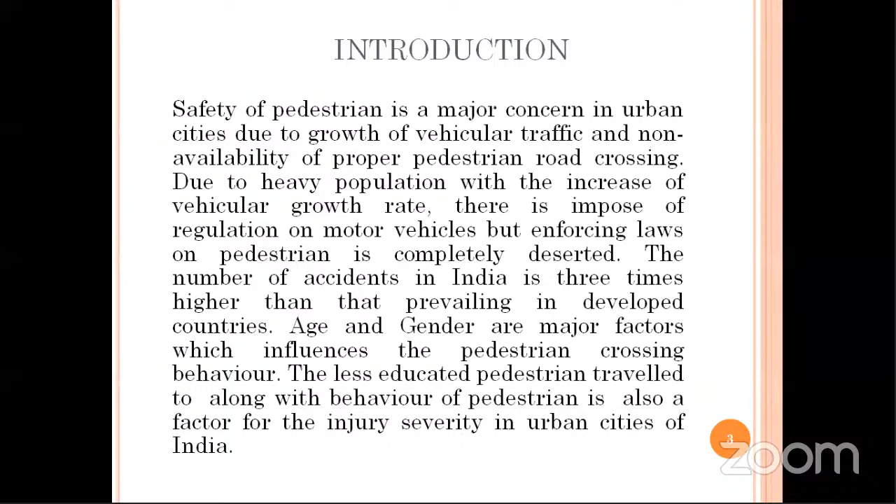There is some thesis we have studied, and some findings are there. From author Jen et al. in 2014, they find that the duration of crossing time varies from 4 to 10 seconds based on different age groups. Children are crossing the roads with higher speed than young and older pedestrians.

Zhuang and all in 2011 studied that about 65.70% of pedestrians are not serious about looking for vehicles, even upon arriving at the curb and before crossing the road. And Guo and all in 2017 found that pedestrians are often compelled to run while crossing the road before the allocated green time elapses.

In Mayono 2002, they find that young pedestrians between 17 and 25 years of age consistently score higher on model competence than adults. And Khatoon and all in 2013 found that male and young adults have a higher probability of road crossing as compared to female and older persons.

These are the findings of the authors. Now what are the drawbacks? In Kadali and all 2013, the shortcomings are that they assume the pedestrian's change in direction is always the same in different conditions, and consider it as a binary condition.

What is the scope? In the real field, pedestrians may change their crossing pattern in different ways according to their suitability. In Khatoon and all, 2013, their shortcoming is they did not correlate the observed risk with actual crashes, as actual data was not collected. From this we have scope that to narrate such correlations, we need to collect required data from police records over a long period, from which we can calculate data and find future scope.

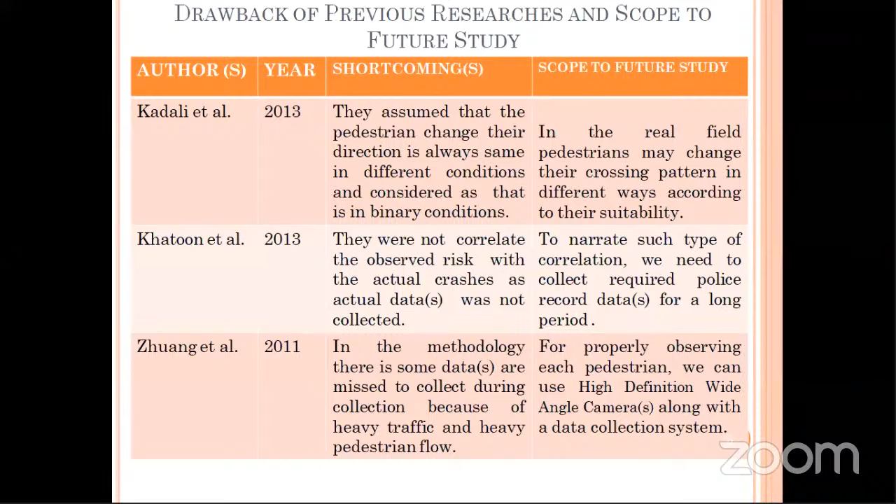In Zhuang and all, 2011, the shortcoming in their methodology is that some data were missed during collection because of heavy traffic and heavy pedestrian flow, as they stated in the paper. What is the scope? For properly observing each pedestrian, we can use high definition wide angle cameras along with data collection systems. These are the scopes, and then we moved through a methodology using high definition cameras.

The field questionnaire survey was conducted during the peak hour of the day, one day in a city, under different conditions. The variables include age, education, monthly income, and pedestrian situation.

We also took the situations of pedestrians on the road, whether they are not hurried, moderate hurried, or most hurried. If they are not hurried, they will listen to you. If moderate hurried, they will listen but aren't interested in giving answers sometimes. But if most hurried, they will not listen, will not bother about you, and will cross the road as usual, not caring about the survey. These are the situations and variables we have taken.

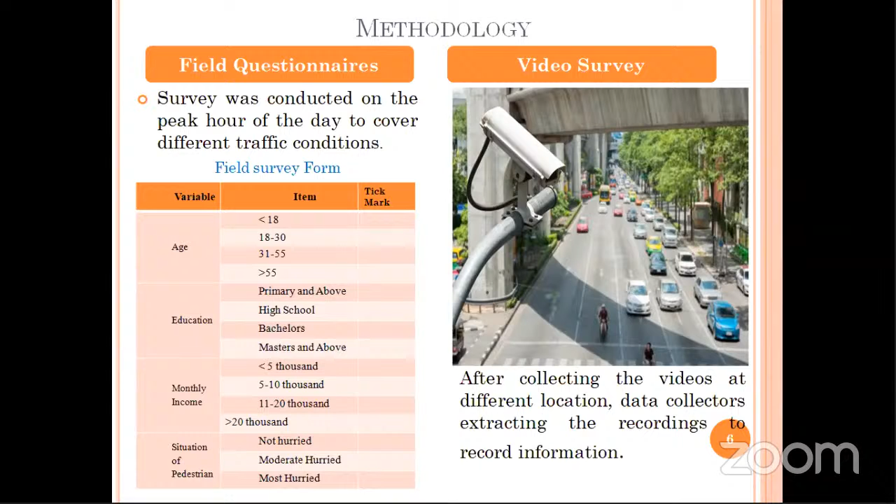This shows the variation of time with respect to age and gender of the pedestrian. Children pedestrians take 17.87% more waiting time due to fear of crossing the road than adults.

While observing the data, we found that children follow their elders. They fear crossing the road and will wait for a time, but when their elders are about to start crossing, they will run and cross the road in a hurry, speeding up.

Due to this, accidents may occur. We found that children take 21.9% less time to cross the road when following their elders.

Survey results show that adult pedestrians are more liable to risky crossing behavior, decreasing both waiting time and crossing time compared to older pedestrians. However, children take less time due to their childishness, as they are following their elders.

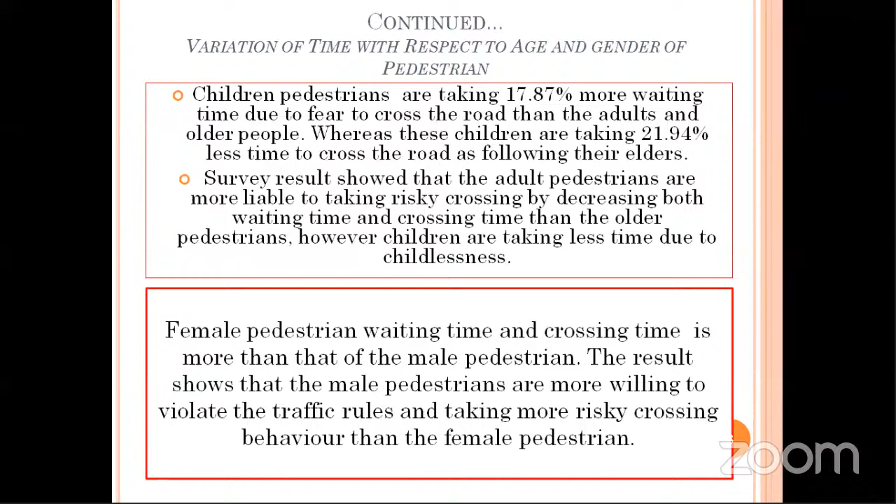We have also taken data from the crime branch of Odisha, as our research was conducted there, on the number of pedestrians killed. You can see that younger pedestrians, aged 25 to 34 years, are more often killed while crossing the road.

This is because they are not interested in following regulations. They may be aware of the rules but are not interested in following them, as they are in a hurry due to their freakiness and youthfulness. In India, we found that young male pedestrians are the most vulnerable group in the system.

There is a high rate of accidents occurring in the 18 to 54 age group due to their carelessness and aggressive behavior while crossing.

Whenever we ask questions to the younger pedestrians during questionnaires, they don't bother about what you are asking. Even when we ask about wearing helmets or watching the roadside, they won't bother. So we have to make strong rules and regulations, and provide some facilities to make them safer.

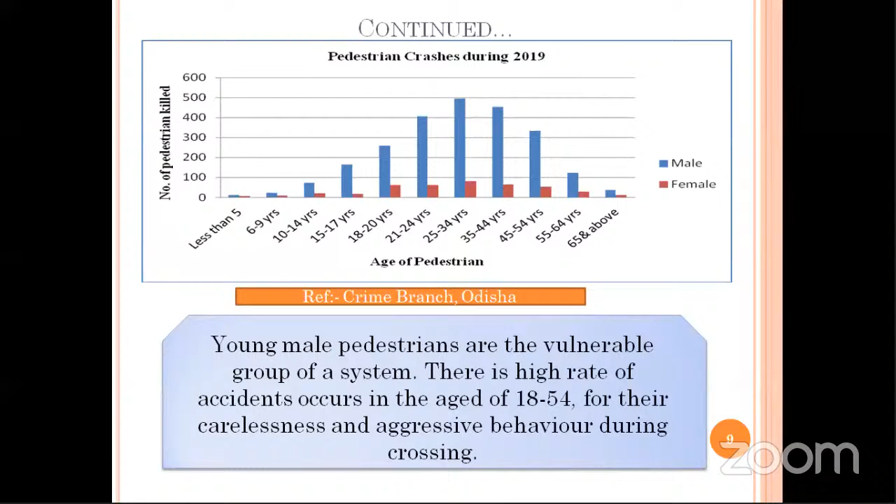From this observation, we conclude that male pedestrians have significantly faster walking speed than female pedestrians. Male pedestrians are more willing to violate traffic rules, and children and younger pedestrians need to be significantly guided and motivated by their guardians regarding traffic safety. Lack of awareness and less education cause more pedestrian accidents.

Based on the lifestyle of a developing country like India, people are not serious about road safety guidelines because they are always trying to develop themselves and are in a hurry to compete with others. They want to make their lifestyles higher than others.

The duration of waiting time and crossing time for pedestrians can be used to develop a safety model, with awareness cum pre-implementation of rule programs organized in coordination with road users like pedestrians. We can't just implement or force rules and regulations onto pedestrians; we have to include them in preparing the rules and take feedback from them. Only then can we implement rules and regulations for the betterment of pedestrians.

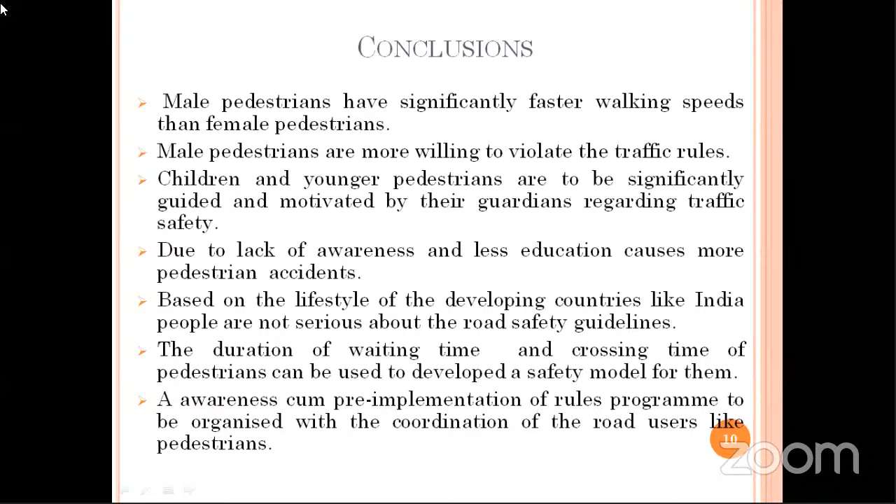The future scope we found is the induction of broad in-depth knowledge about safety to be made aware among road users by the road safety authorities.

As I mentioned in the last slide, we have to take the pedestrians into account, take their feedback, and make regular discussions with them. Only then can we find better rules and regulations acknowledged by them.

Design the extension of curb width at the crossings to control the speed of the vehicle for smooth pedestrian crossing. We have to control vehicle speed by providing lighting arrangements and other facilities for smooth pedestrian crossing. With that curb, vehicle speed will be lesser, allowing pedestrians to cross through safely.

An automatic light reflector system can be installed on the road to specify crossing time for pedestrians during night vision, since drivers using high beam lights can cause problems. At crossings, lighting arrangements will be provided for the duration of road crossing, so drivers can be alerted before the pedestrian crossing, making it safer.

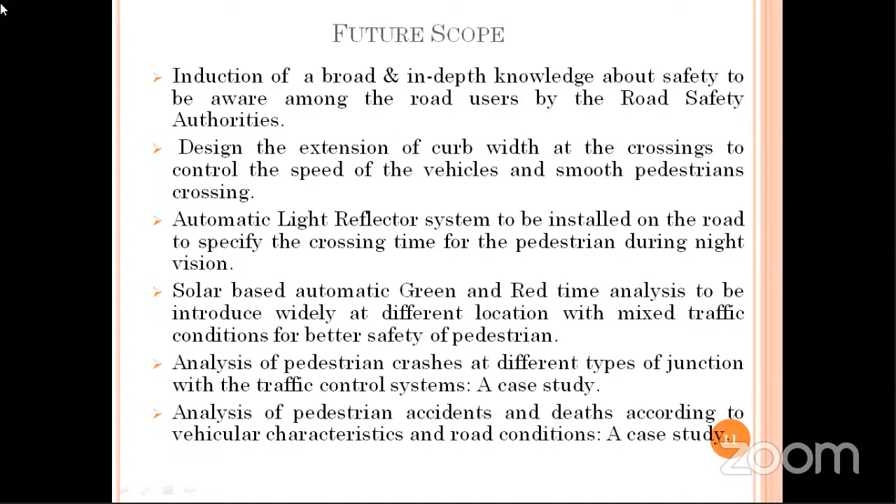And the vehicular characteristics also we have to find out. What is the vehicular going on, who are traveling, and what are the types of vehicle, whether it is a goods vehicle, a school vehicle, or bikers, cycles, what are the types of vehicle, and what are the drivers' vehicular characteristics, we have to find it out. So that case study also we can make it out, and then we have to make separate things for the pedestrian.

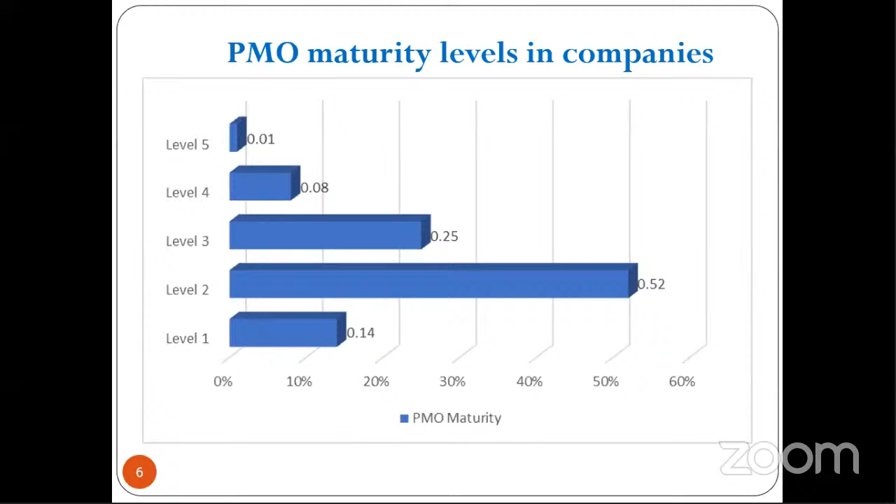So, designing the database. The aim of designing the database is to migrate the existing information from the current project management system, followed by random papers and various documents, to a new system that's automated using one of the programming languages, so that it can be accessed quickly and save time and effort, and obtain information promptly and in an attractive graphic manner.

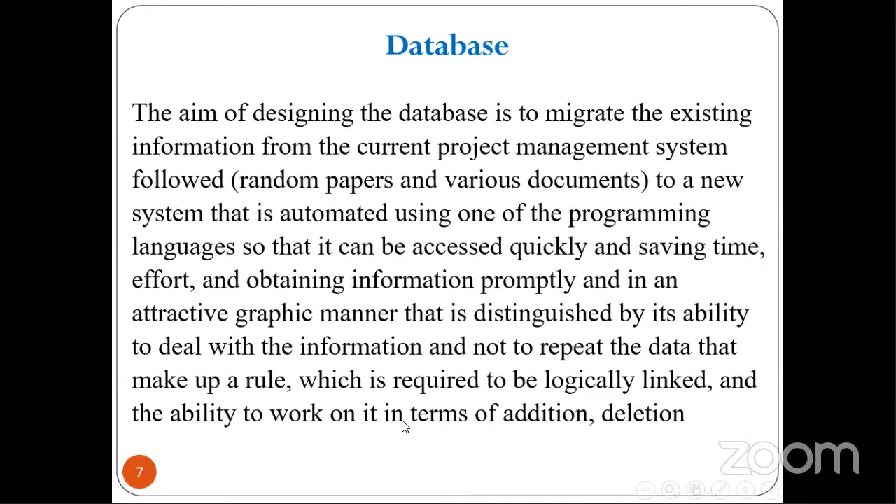That is distinguished by its ability to deal with the information and not repeat the data that makes up a rule, which is required to be logically linked, and the ability to work on it in terms of addition or deletion.

By applying database design rules and through the Java program using SQL as a programming language, and after collecting all information from the reality of projects and companies, work was done to design an electronic program for the project management office to manage projects through it, and control the movement of materials within the company's warehouses.

Achieve the optimal distribution of resources between projects, follow up and know the completion rates and compare them with the planned, find the appropriate solution, and issue periodic reports to higher management.

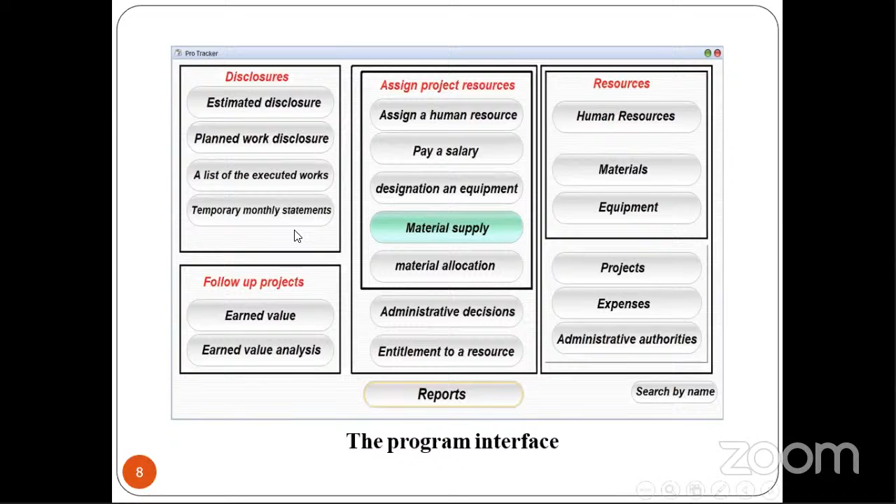I'm showing in this figure the main interface of the program, and how we can enter the data. So first, after the contract between the owner, the implementing party, and the designer of the project, determining the contract period.

And its cost and time, and setting general and special conditions, the project data is entered by this interface. We enter all necessary data about the project - its name, its location, etc. - and all necessary information about the contract, such as start date, receive date, end date - all the necessary information we can enter by this interface.

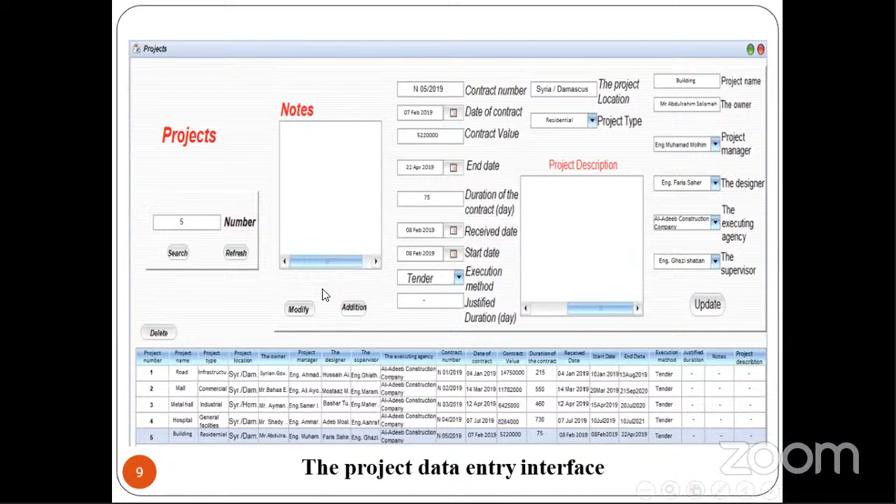Then we enter the personal human resources data working within the project, such as employee name, category, certificate, etc., and then determine the job title, the tasks required of each employee within the project, and determine the basic salary, taking into account additional deductions and

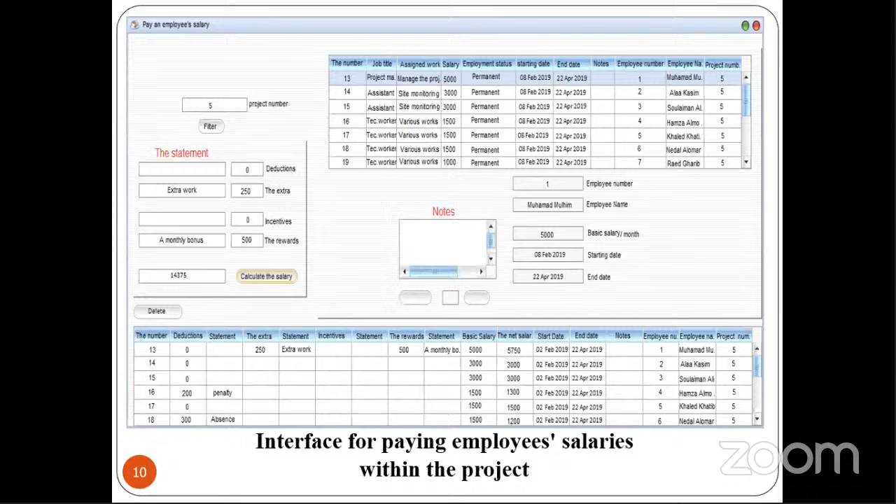incentives. Then this interface shows the determining of the equipment used within the project and the date of work for each of them, and the statement of working hourly cost, driver's cost, maintenance cost, etc.

We can enter all the necessary information about the equipment by this interface.

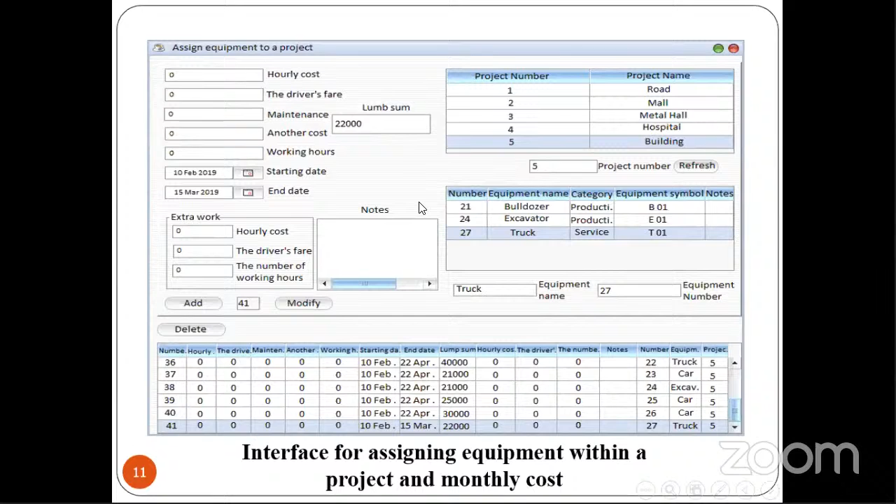So then we enter the material, the indication of the imported quantities, withdrawn quantities, and the available balance of each material within the warehouse. Then temporarily monthly work statements for the work performed monthly or according to the agreed data. And finally, we entered the items of the estimate disclosure, then the monthly planned and executed works and the data of implementation of each work.

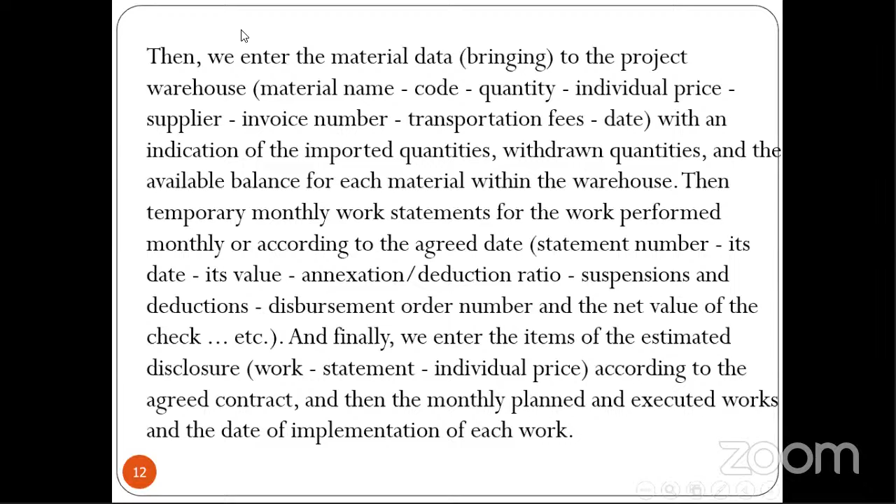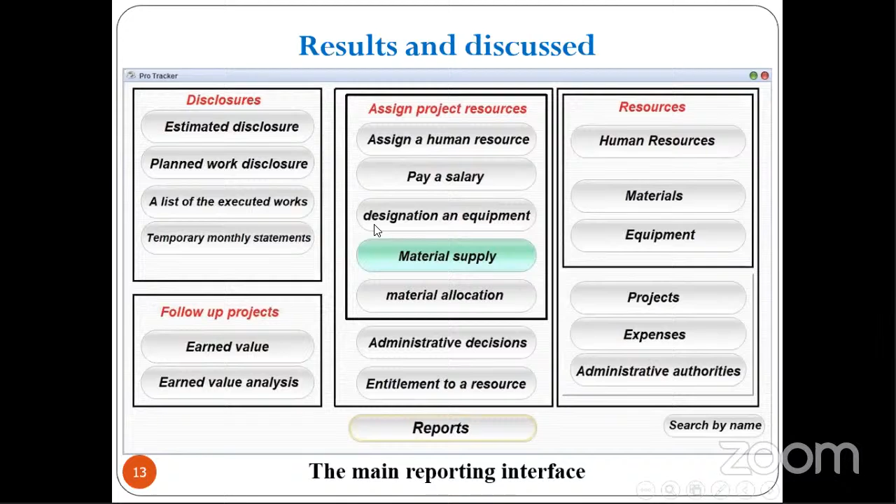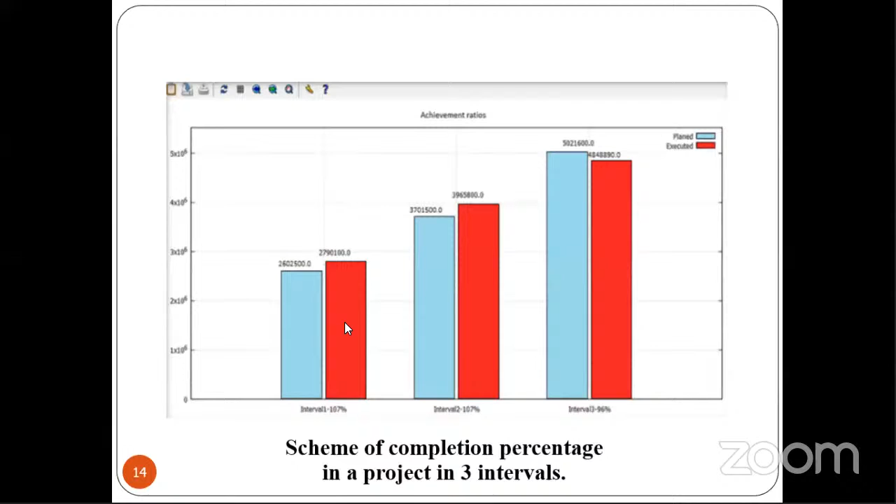After we entered all necessary information, we get these results. In this interface, we can get any report about any project. This report explains a scheme of completion percentage in a project in three intervals, and this report of materials withdrawn from a project warehouse. We can get any report about any information that we entered into the database.

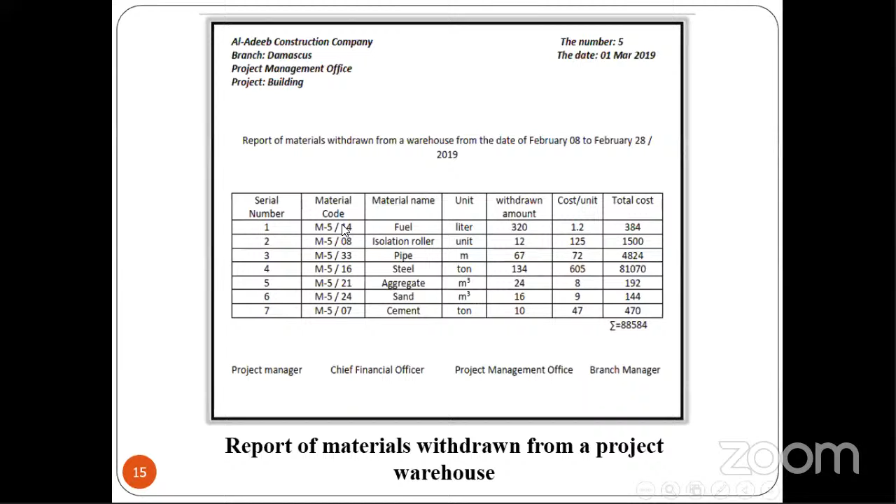After completing the entry of the daily data of the project, which explains the executed works, their quantities, and the expenditure of human resource equipment, and bring it to the site, it's necessary to issue periodic follow-up reports, monthly, annual, and to company's senior management.

Through the earned value management system, the project management office regularly monitors the performance of the project, as it's considered an effective tool to link the actual completion of the planned work within the project with the time that has elapsed and the cost that was spent compared to the project's time and financial plan.

After knowing the values of each of the planned value, earned value, and actual cost at any period of any project's life, depending on the completed and planned works, the project's earned value equation can be calculated. So according to these values, we know the project's status.

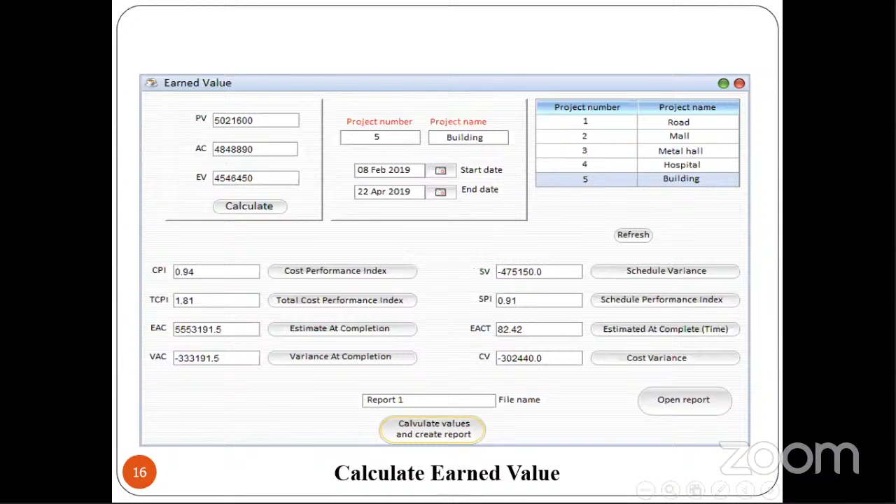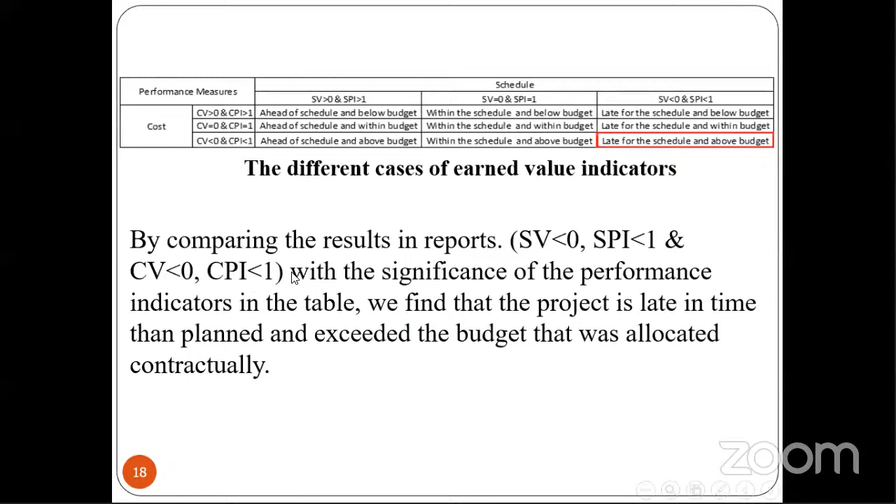So according to the result mentioned above, about the status of the project exceeding the cost and the planned time, the project manager must read and analyze them carefully, know the cause of problems and whether it's critical or not, apply corrective measures to his project, and discuss possible options to restore the project into a correct path, recording all the problems occurring and how to solve them within a record of lessons learned to avoid falling into the same issues in later projects.

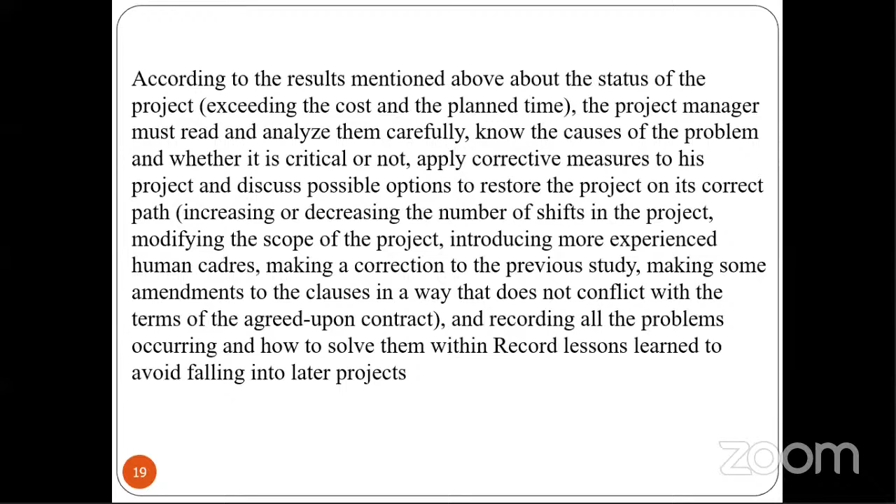In conclusion, the earned value methodology can be considered the best monitoring system as it relies on reliable data and offers many benefits that distinguish it from the traditional methods of monitoring projects during the implementation phase, including an integrated program to objectively control project elements, cost and time, and anticipate their future trends and potential risks with corrective change to projects. It integrates scope, schedule, and cost based on the work breakdown structures.

SPI and CPI provide an early warning indication of current project time and budget status, extracting periodic reports weekly, monthly, or quarterly, which represent good tools for communicating with those involved in the project, helping to identify the types of problems the project is going through.

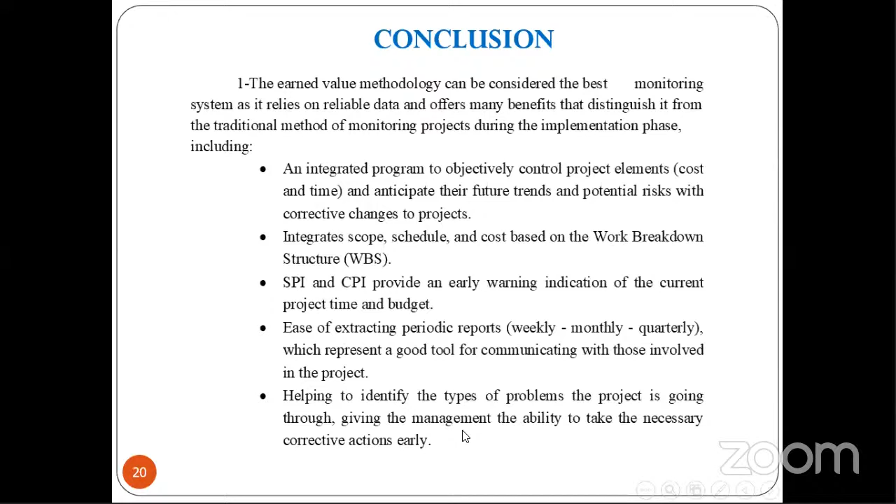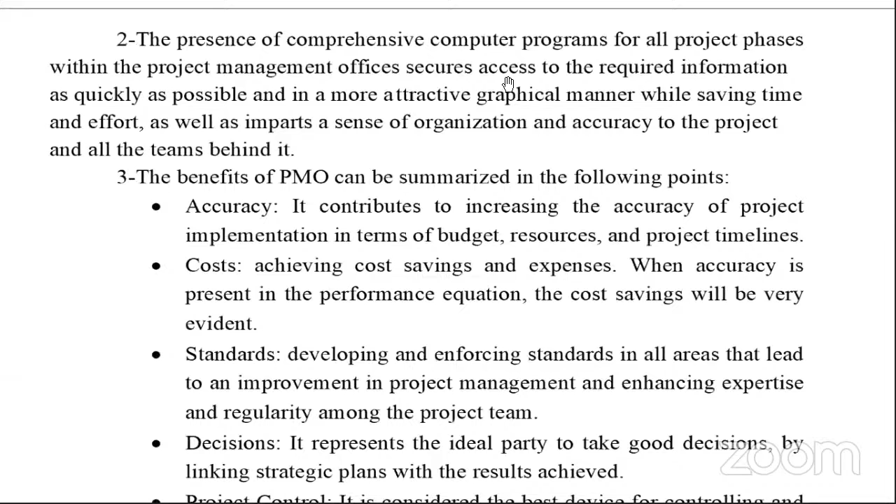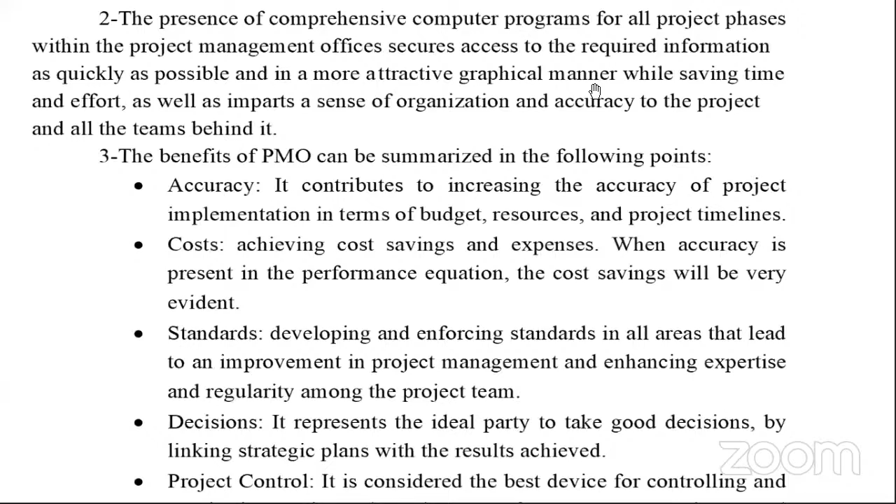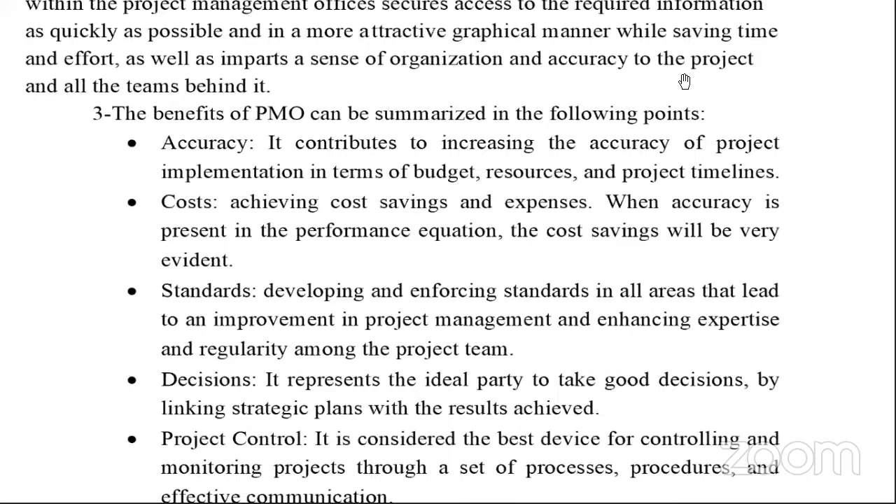The presence of a comprehensive computer program for all project phases within the project management office secures access to required information as quickly as possible and in a more attractive graphical manner, while saving time and effort, as well as imparting a sense of organization and accuracy to the project and the whole team behind it.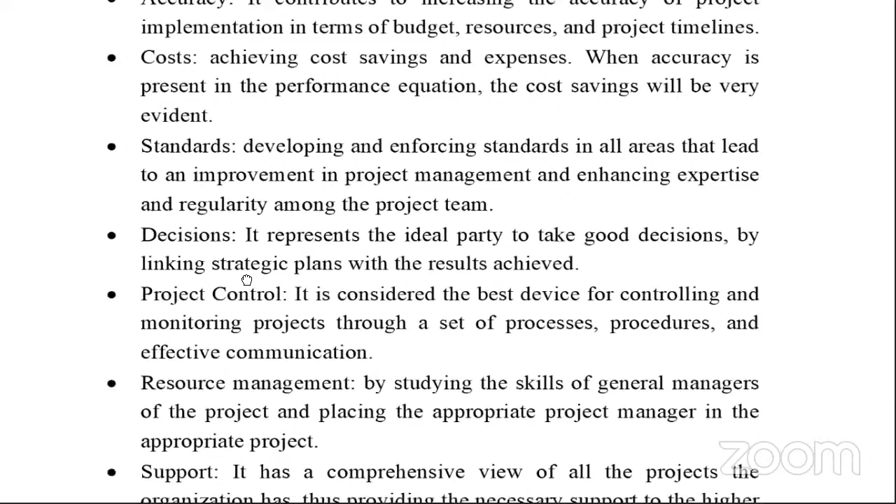The benefits of PMO can be summarized in the following points: accuracy and decision making, project control, saving cost and resource management, and support. These are the references. Thank you for listening.

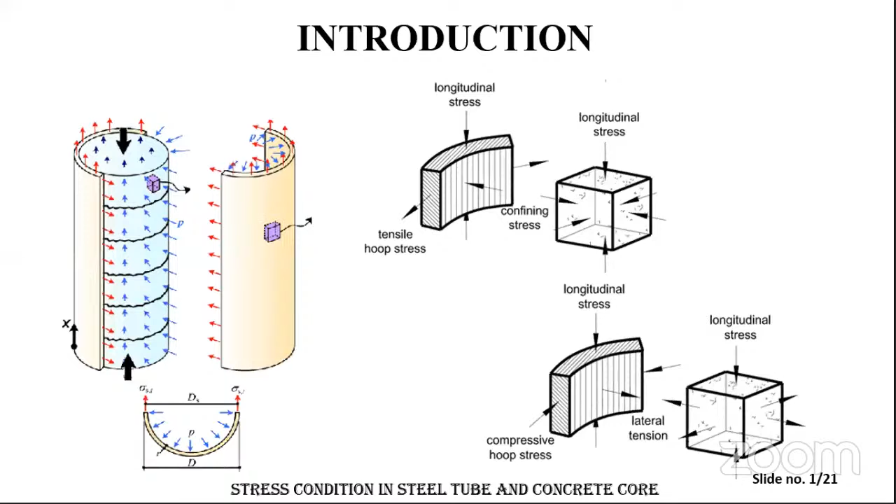So my guide has suggested to carry out this study. I have tried to bring out here the reason why, when this column is subjected to elevated temperature, the load carrying capacity decreases at micro level, what physical and chemical reactions are taking place inside the concrete, because of which the load carrying capacity comes down under fire. So this is what I'm trying to study here.

This is our ISO graph, which is the followed standard for the fire test. Here three types of tests can be done: one is fire resistance test, post fire test, and pre-fire test. I'm here carrying out the pre-fire test.

Pre-fire test means initially after preparing the specimen, the CFST column, it is subjected to the required temperature for which I want to test. After heating, the sample specimen is taken and placed in the UTM machine for the test. After failure, a sample is taken from where it is failing, where buckling takes place.

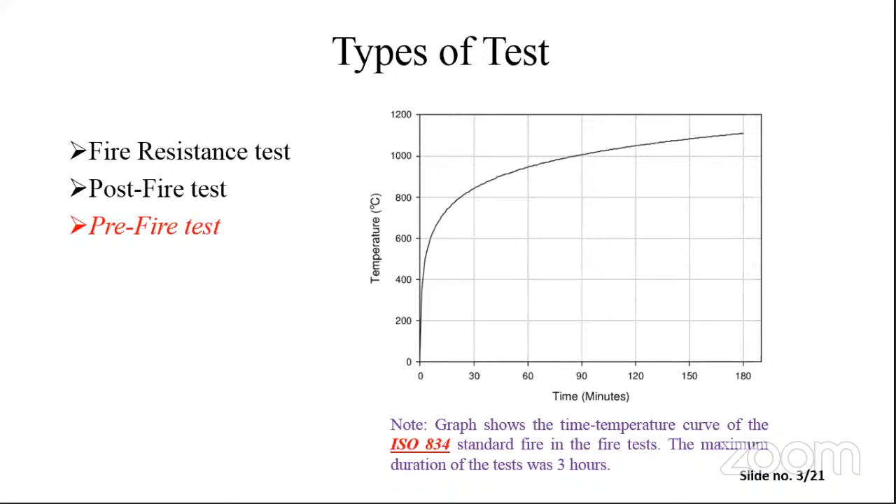At the buckling zone, sample is collected, and that sample is sent for microstructural study. For microstructural study, I have carried out SEM scanning electron microscope, energy dispersive X-ray spectroscopy, and X-ray diffraction. These are the analyses I have carried out to study the microstructure level of concrete, and these are my objectives.

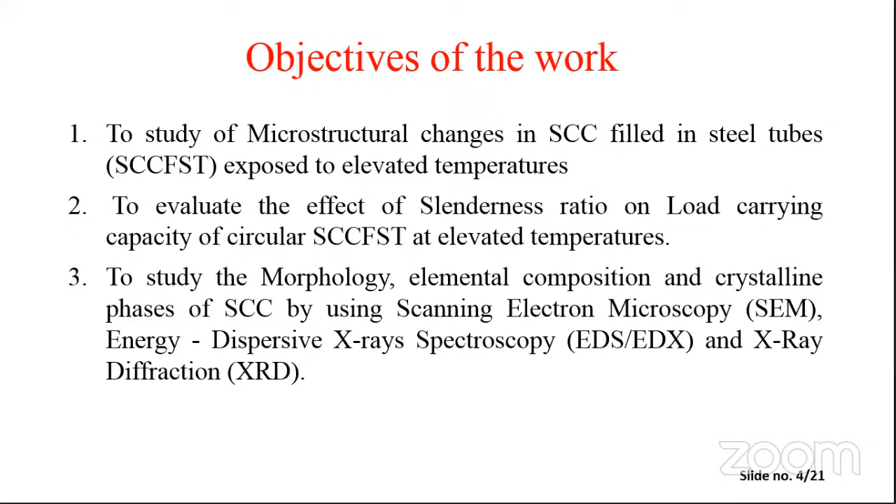These are some applications of CFST column. This is the present tower in Russia, not yet completed, a 31-story tower, Mercury Tower. Total 27 stories have completed so far. They're planning to complete this project in 2020.

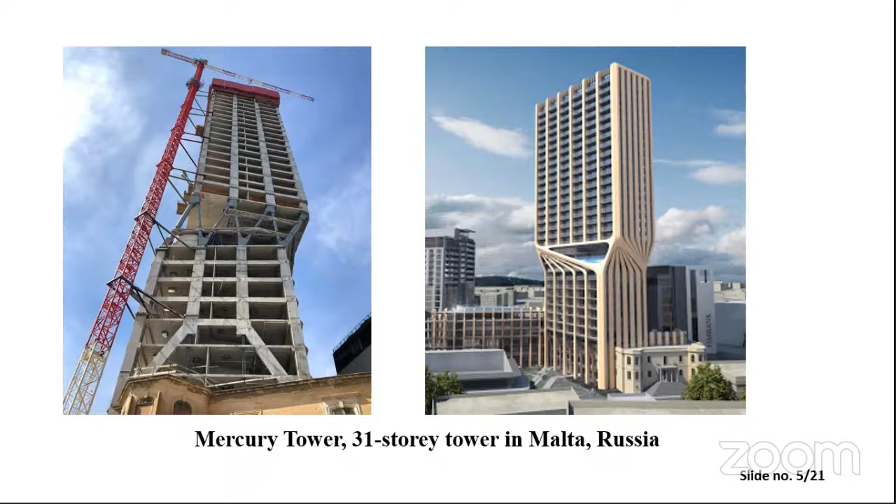We can see here in the middle of the building, they're introducing CFST columns. The whole building is twisted. I don't know how they have designed this, how the seismic loads and lateral loads are taken care of. Special design has been done by the structural engineer. So there are some applications where CFST columns are used.

So for the experimental investigation, I am studying this microstructure in two parts: one is mechanical properties, and the second is microstructural properties. In mechanical properties, I try to evaluate load carrying capacity and weight loss due to temperature of the CFST column. In microstructure properties, SEM analysis is carried out to study morphology of the self-compacting concrete filled in the steel tube, EDX to know the chemical compositions present at respective temperatures, and XRD to know the crystallinity or amorphous nature of the material.

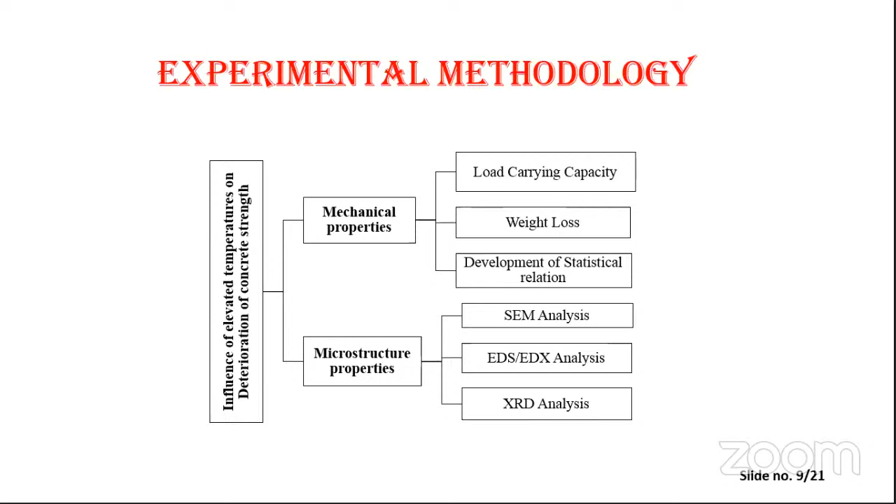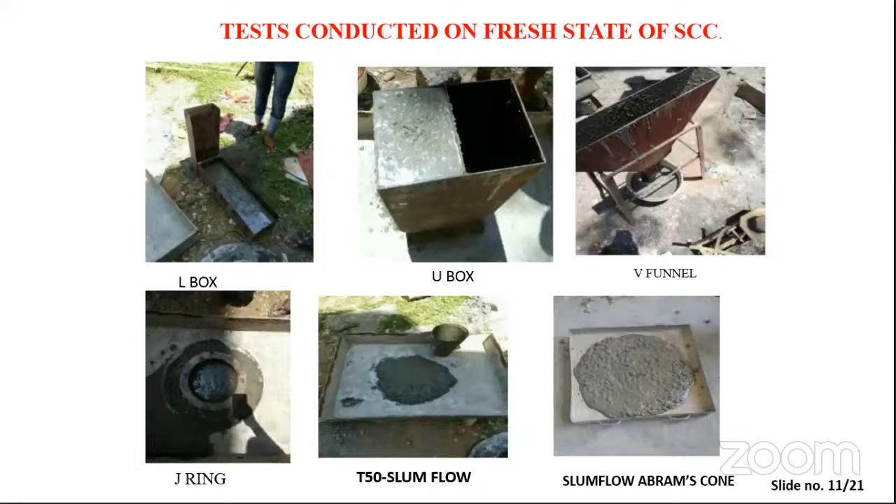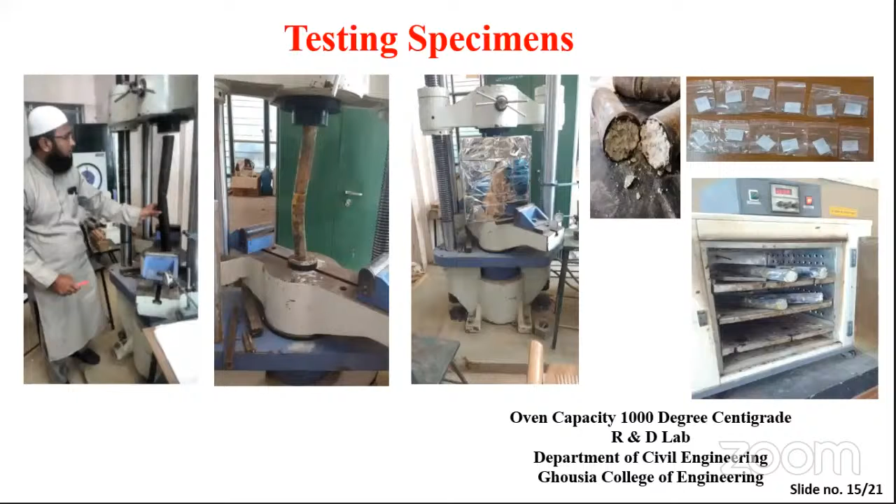So here he did testing of specimens I carried out. These are the results, experimental results. We can observe here with increase in the temperature, load capacity is decreasing.

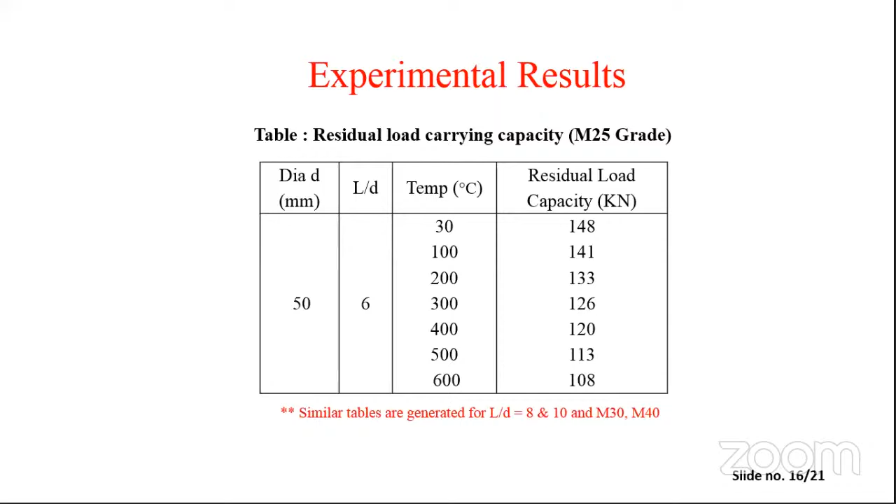So why it is decreasing, that microstructural study is also I'm going to study here. These are the experimental results. Same is presented in the graph. So with different grades also have studied and with different slenderness ratio.

So with increasing slenderness ratio, load carrying capacity is decreasing. Here I'm saying residual load carrying capacity. Residual means retain after heating the column, it loses the strength.

Suppose a column has a load carrying capacity, say 100 kilonewton. After it is subjected to 500 degrees centigrade, 600 degrees centigrade, a column load get reduced. The column may retain 80 kilonewton or 70 kilonewton of strength is left over, 30 will be lost. So that leftover strength we call as a residual load carrying capacity.

Here we can see the percentage of that is decreasing with increasing in the slenderness ratio, and also percentage of weight loss. We can see here concrete is inside the steel tube. Even after that it is losing its weight to 8 to 9%, maximum up to 600 degrees centigrade has tested.

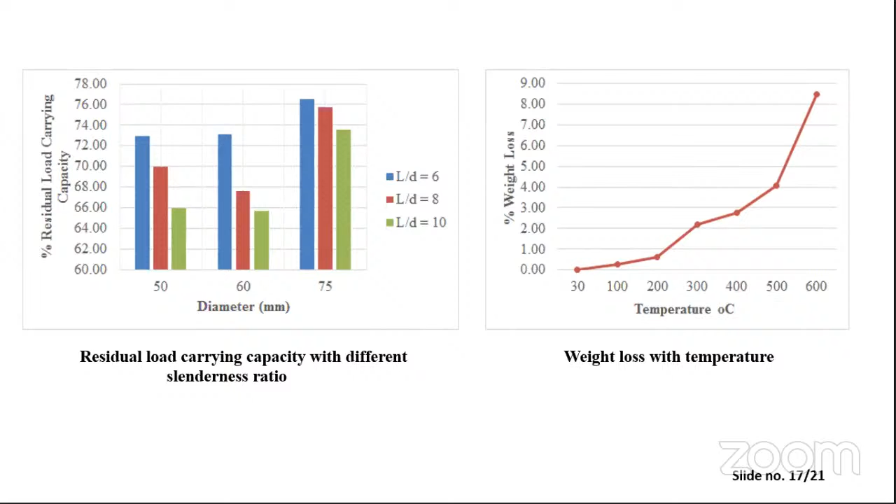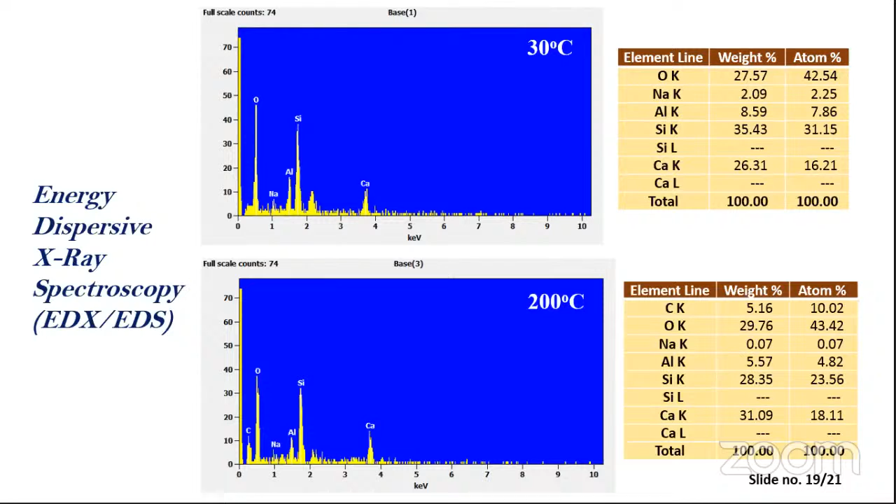If you observe here on the right side, oxygen is there, that is 27% at 30 degrees centigrade, and same is 29% at 200 degrees centigrade. Whereas aluminum is 8.59, whereas here it is 5.57. So some elements are increasing with temperature and some are decreasing. That is also one reason for deterioration of mechanical properties of concrete.

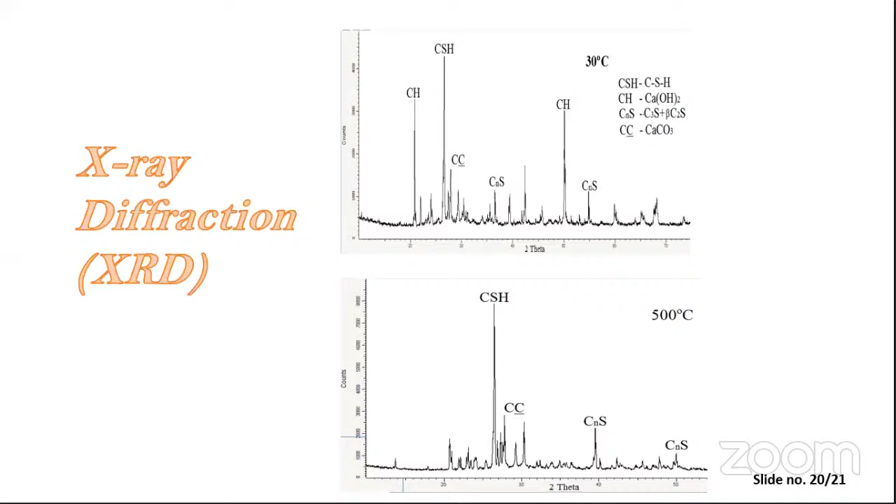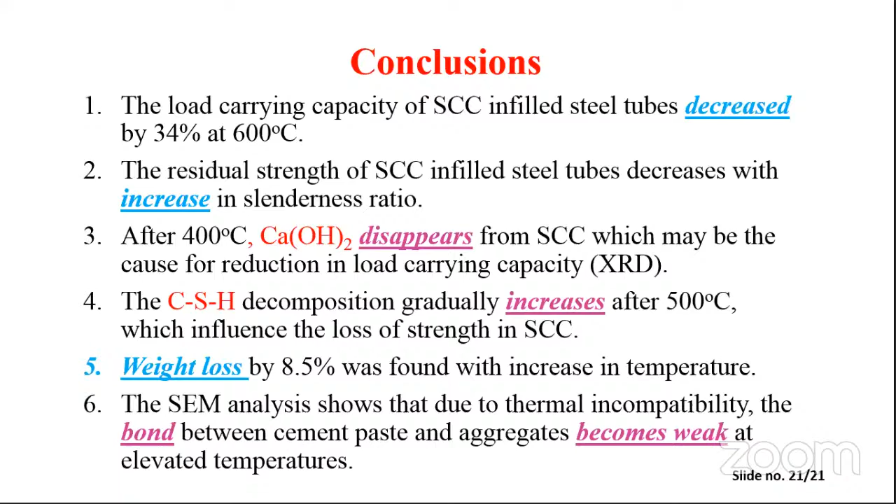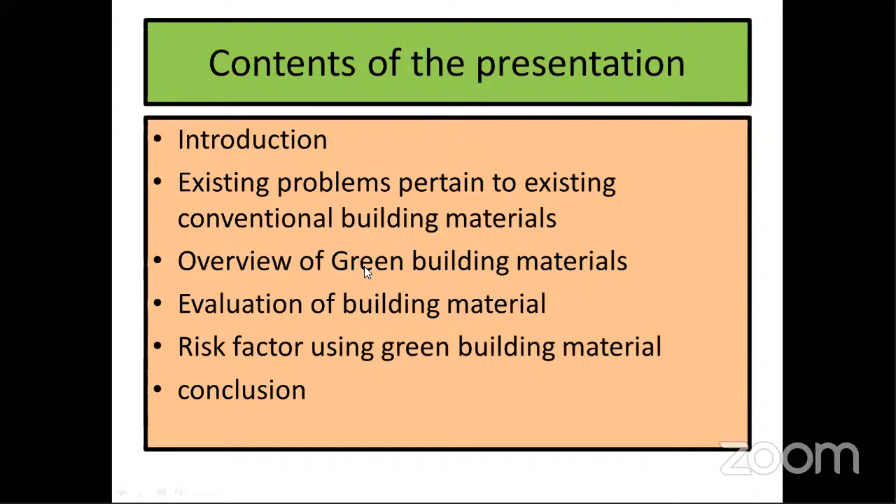Let me start from the introduction. The lifestyle of the human being is constantly changing. Because of this, in regular life, the existing buildings' lifespan is actually reducing, and the demolition as well as renovation of buildings is increasing.

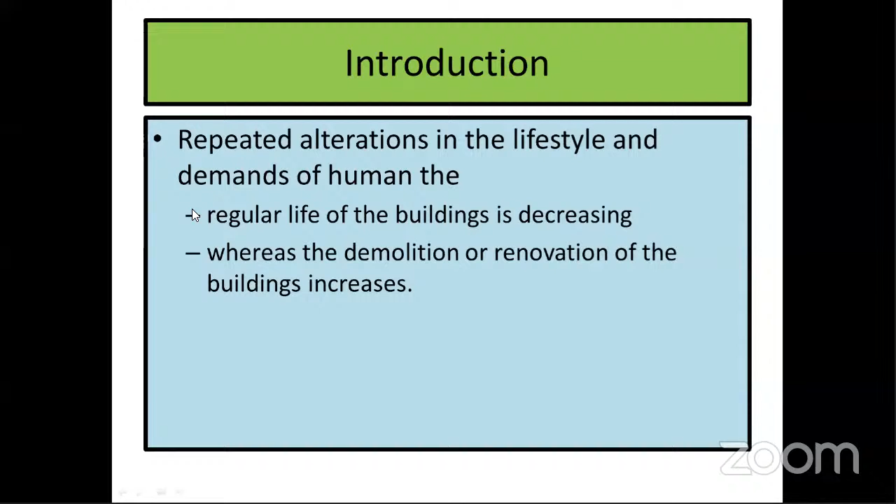So because of the changing lifestyle of humans, this is all happening. This development, demolition and renovation in the construction industry completely depends on depletable resources. When you deplete the resources, as you all know, we should think of sustainable development. So in that context, to have a sustainable construction industry, we need to reduce the consumption of depletable resources. That is very important.

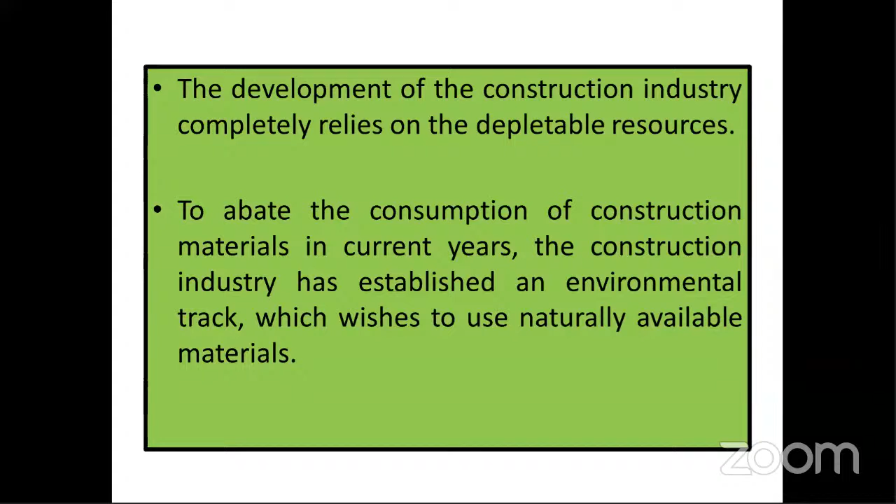In this context, there exists the green building material. When you look into the overview of problems that existing conventional building materials have, it is nothing but the energy consumed in that building material, the carbon emissions coming out which eventually pollute the environment, and the high usage of water.

If carbon emissions are increasing, carbon dioxide is coming out, and that is automatically a greenhouse gas, which will increase the temperature of the earth. The next one is usage of water - that is also a main criterion. We should look into different materials which, when used, will reduce the usage of water.

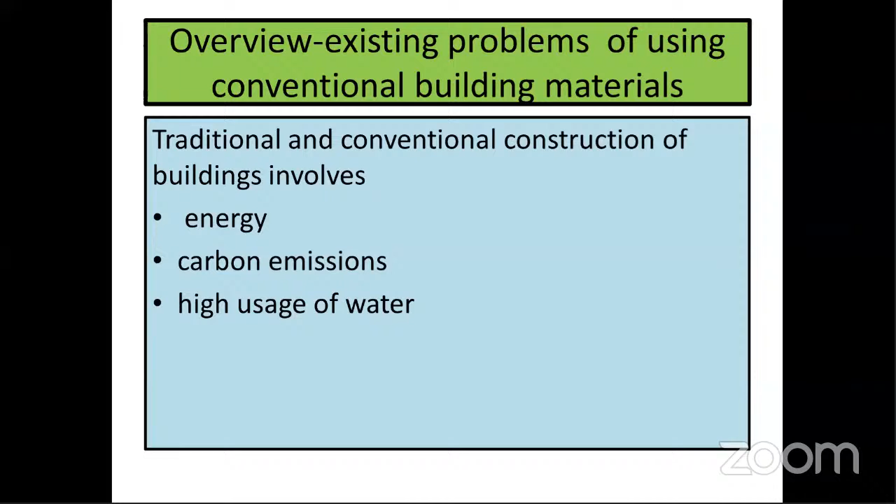These are some of the existing problems that conventional building materials encounter. So we should find a good building material which will overcome all these problems - that is very important. These are all the things I have explained, shown here as an image.

The techno edge we are seeing for conventional building material is nothing but environmental pollution, depletion of existing resources, energy consumption, production of byproducts, high maintenance, and health impact. All these are demerits of the conventional building materials we are using now.

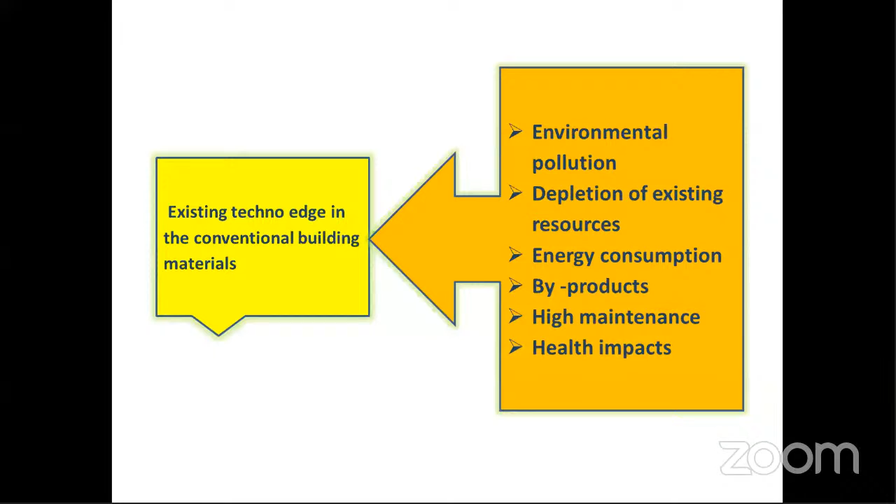So when we talk about green building material, we can also call this green building material a sustainable building material. So to go green, we need to find such a green building material.

When we talk about this, we should understand what it means. Naturally, it should overcome all the demerits of the existing building material. So there comes the prevention of pollution - it may be air, water, or land - and it should conserve water.

Toxins which are exposed from the materials should be lowered so that humans are not exposed to it. Then it should contribute to minimizing the impact of environmental degradation - the byproducts coming from the material should not degrade the environment.

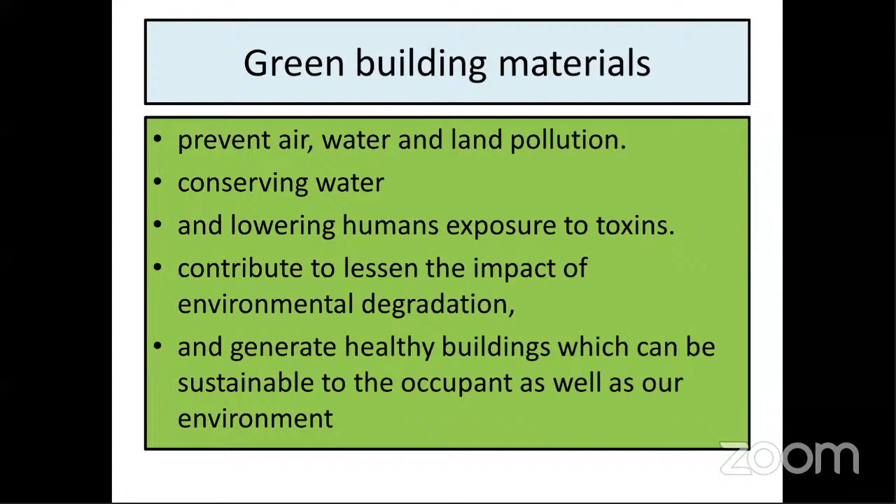Ultimately, the green building material should provide a room for healthy living for an occupant. So when the entire thing is satisfied, then that particular material can be called a green building material. We have got 7 components of this green building material.

That is nothing but water efficiency, waste reduction, toxin reduction, indoor air quality, energy efficiency, operation and maintenance optimization, and naturally material efficiency. All these 7 components must be analyzed individually. Then only we should conclude whether the material you have chosen is a green building material that is not deteriorating or degrading the environment.

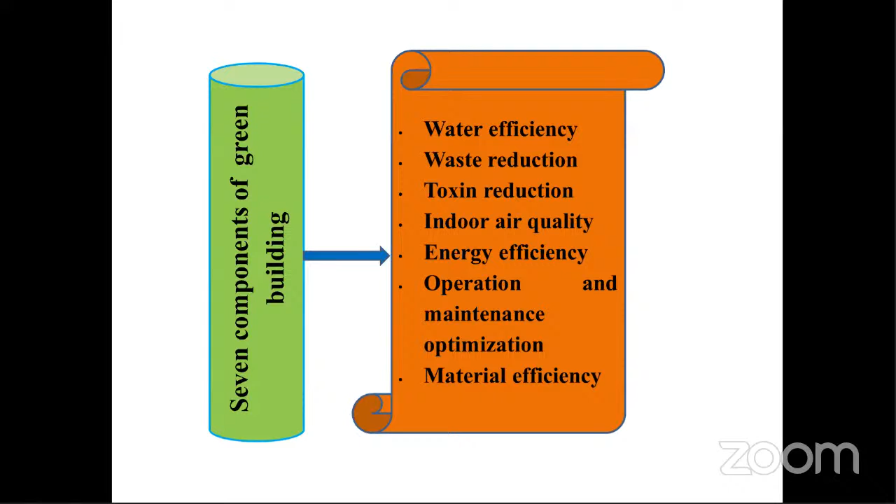Thereby it provides a healthy room for sustainable living of the occupants, right? So these are all the potentials or merits that the green building should have. So to achieve material efficiency, it must be long lasting, and it should be recycled and reused again.

Some products can be reused, some can be recycled. So the building should be designed in such a manner that it allows the use of fewer materials. As far as possible, fewer materials could be used in designing the entire building compared to a conventional building.

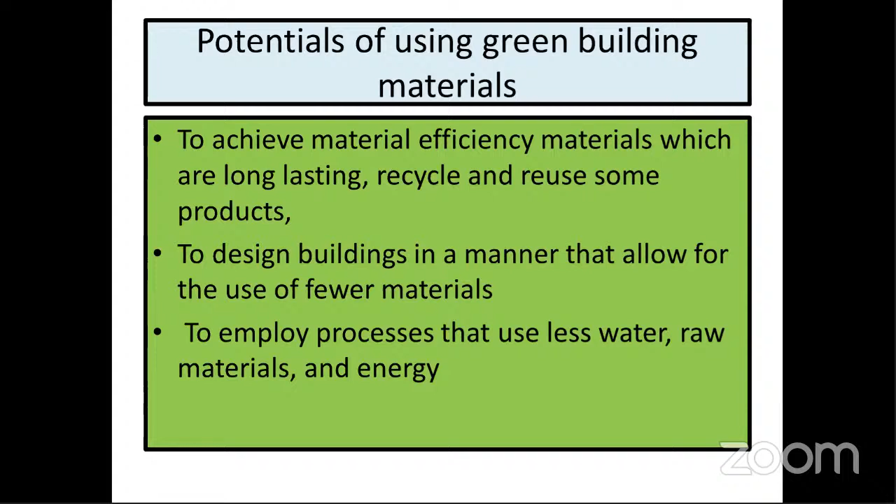We should employ processes that use less water, raw material, and energy. All these are the potentials of using green building materials. It should have properties like being recycled, biodegradable, and especially locally available.

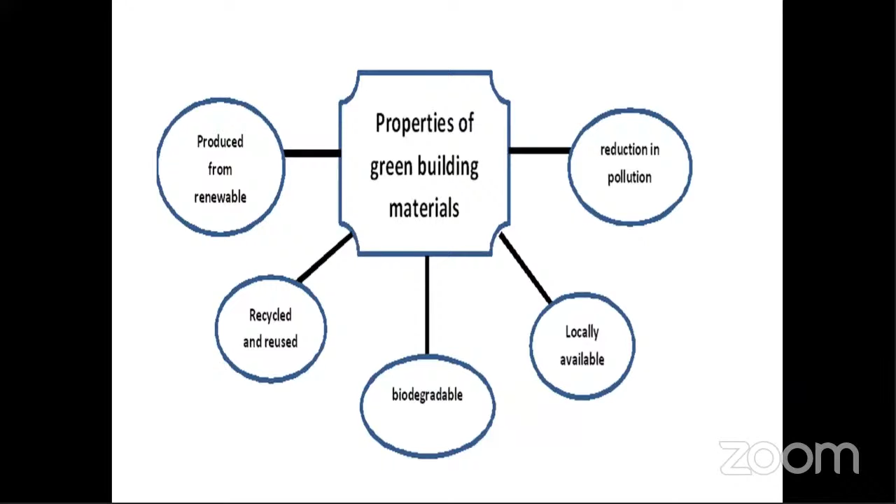When it is locally available, naturally the cost and time of procuring that building material will automatically be reduced. As I told you, the slide shown before will tell you the property of the building material, and then how to evaluate it.

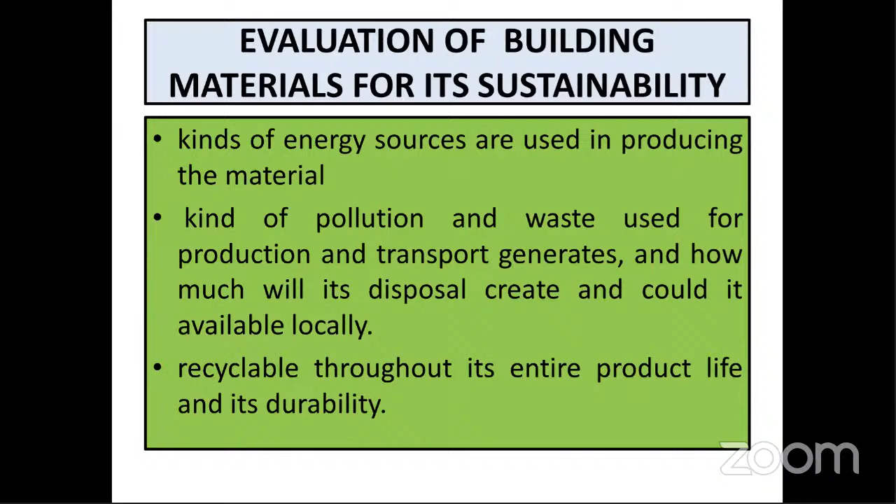That is very important. So how to evaluate? We have 3 stages. The evaluation of the green building material actually starts from gathering the material to the disposal. In between, we have so many processes, and all these things should be considered in this context.

So in order to evaluate that building material, we have 3 stages: pre-building stage, ongoing building stage, and post-building stage. These are the 3 stages that we need to evaluate one after the another.

The first stage consists of finding the raw material, which can be extracted, manufactured, packaged, and transported to the building site. All the material involved in manufacturing, packaging, and transporting a particular building material has to be analyzed. This can be said to be the raw material stage.

The second stage, during the building construction, commences during the construction of the building. It involves the maintenance and repairing of the material. Some of the material you're using needs much maintenance activity, and similarly repairing will also be there.

So that also should be looked into. We should find out the better material which has less maintenance and less time for repairing, and is everlasting or long lasting, we can say.

The third one, which is considered the least recognized stage, is the third stage, and this refers to the post-building stage. As I told you, we need to analyze from the gathering of the building material to the end, the disposal of the material.

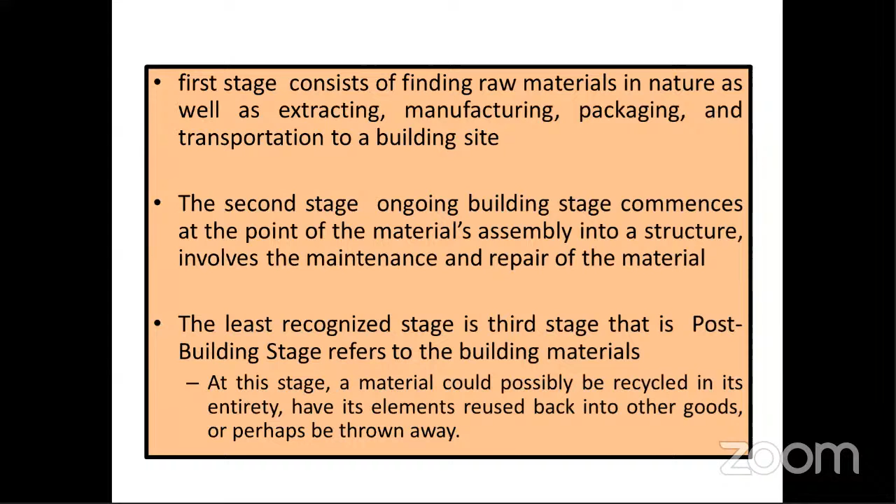This is considered the least recognized stage, because while choosing the raw material itself, when we feel that material will be very much suitable for the sustainable development of the environment, then naturally the disposal will also be reduced. When you come to the context of disposal, you will not encounter much problem. Because of that, we can say the third stage is the least recognized stage.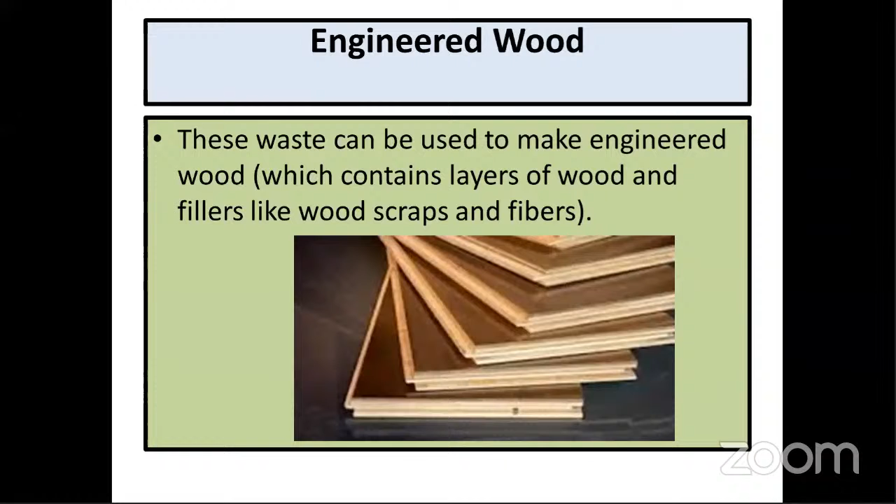Okay, so bamboo, right? And we have that engineered wood, which can be used. And we have straw bales and reclaimed wood, and cork, and mycelium. Mycelium is actually a root-like fiber found in mushrooms.

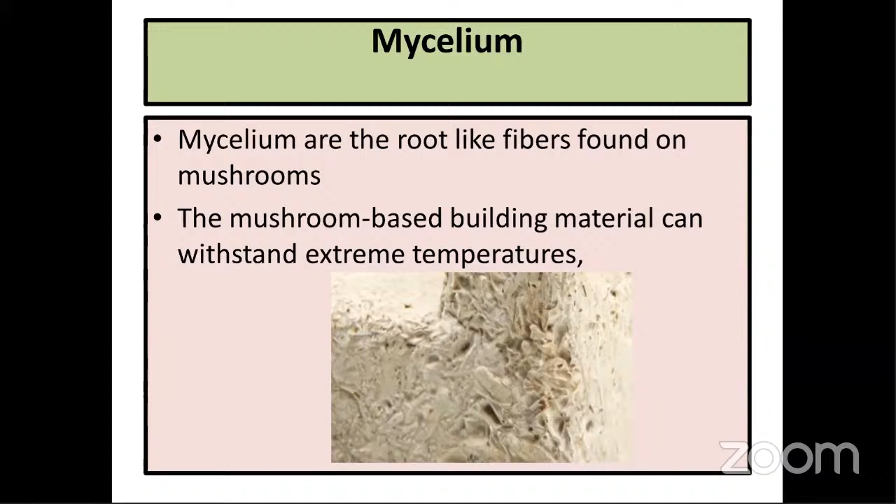This can be used as a base building material which can withstand extreme high temperature. So we have some more materials like ferrock and recycled steel. In ferrock, we use steel dust in order to produce the concrete. It is called ferrock since the concrete and the ferrous materials are mixed together to form a concrete.

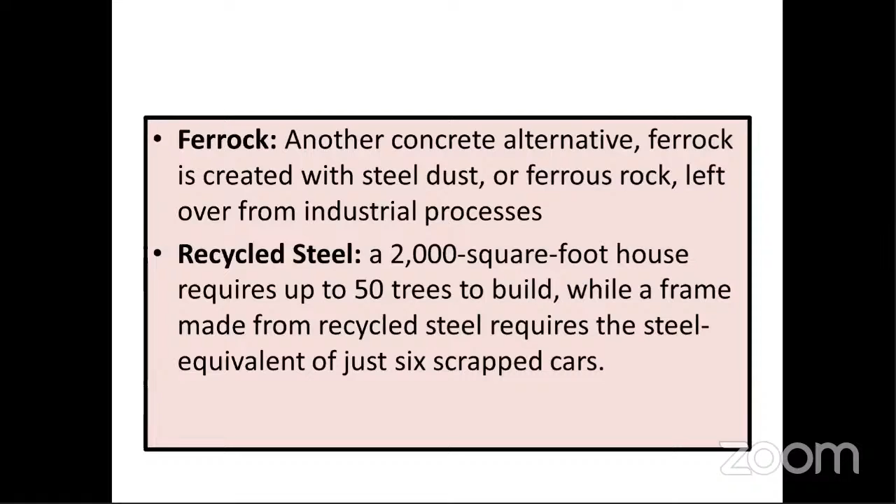Some of the materials listed here, like light emitting cement, Martian concrete, self-healing of cracked concrete using bacteria, and wood foams, transparent wood, are all newly created green building materials. They are under testing. These are some of the green building materials which will ultimately save energy and reduce carbon emissions, with a reduced level of embodied carbon.

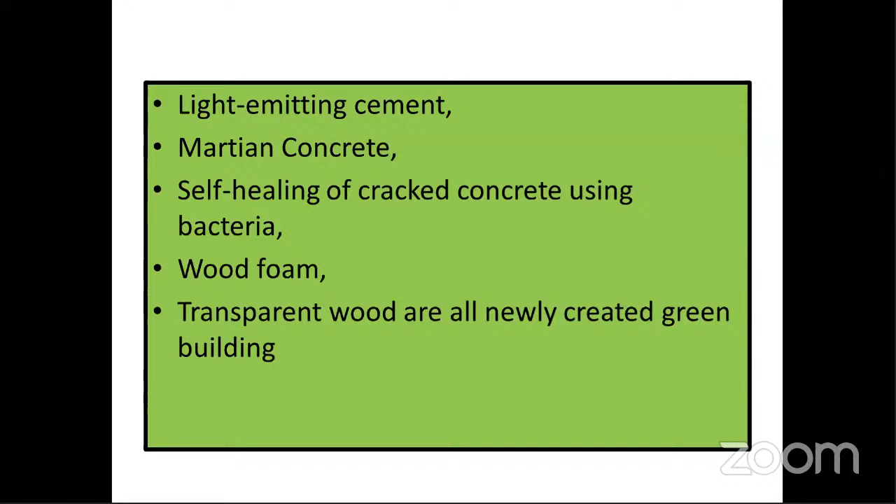Thereby it emits less carbon emissions, and the usage of water can also be reduced. These are some of the green building materials that can replace existing conventional materials. We are not going to produce a new material; how the existing material can be converted into a green building material, that must be our motto. And how to reduce material usage in construction must be the main motto of any construction engineer.

Now coming to the risk factors, there are some risks in using green building material. The first is negligence of constructability in the green design. This is a major risk factor that many contractors and engineers just neglect. They should look into it.

Then design-related risk factors include inexperience of the designer in green projects, limited creativity and innovation in green designs, and slower response to change orders. These are design criteria, because when talking about design we should look into the load coming into the building, and whether the material chosen will withstand that load.

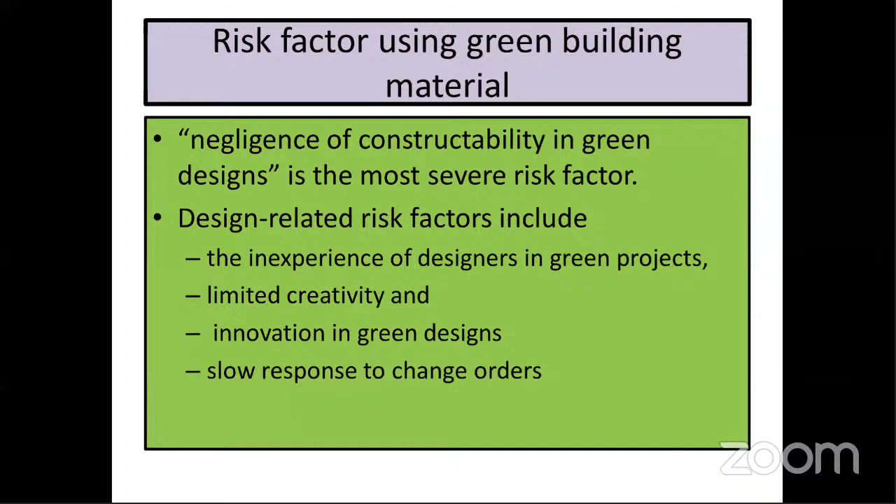We should also consider the durability of the material, whether the building constructed using green building material has increased duration or not, and compare accordingly. We should analyze all these things before choosing a good green building material. This risk factor is also there while using green building material.

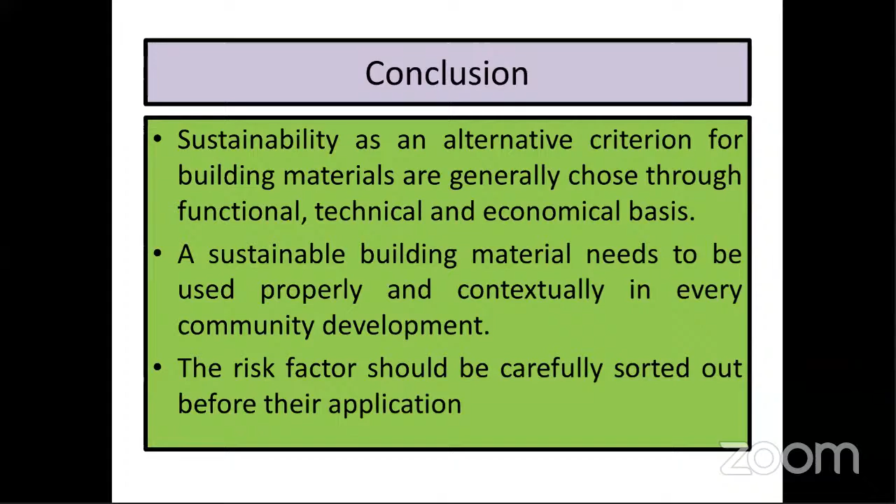So coming to the conclusion, when we talk about green building material, we should talk about sustainability. The sustainable building material needs to be used properly and contextually in every community development, and the risks that exist in using green material should also be addressed properly. With that, I want to end my presentation, sir.

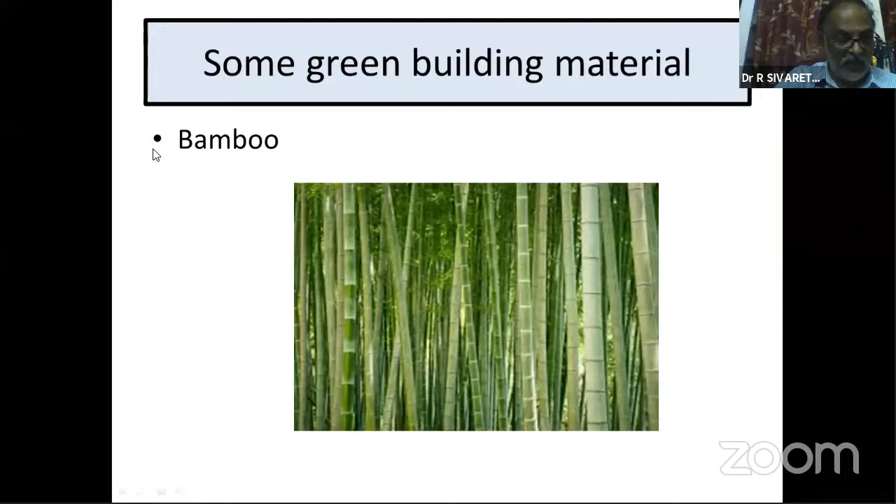From this research work, what we could understand is that we could not have a society if we destroy the environment. And one more thing: the earth will not continue to offer its harvest except with faithful stewardship. We can't say we love the land and then take steps to destroy it for use by future generations.

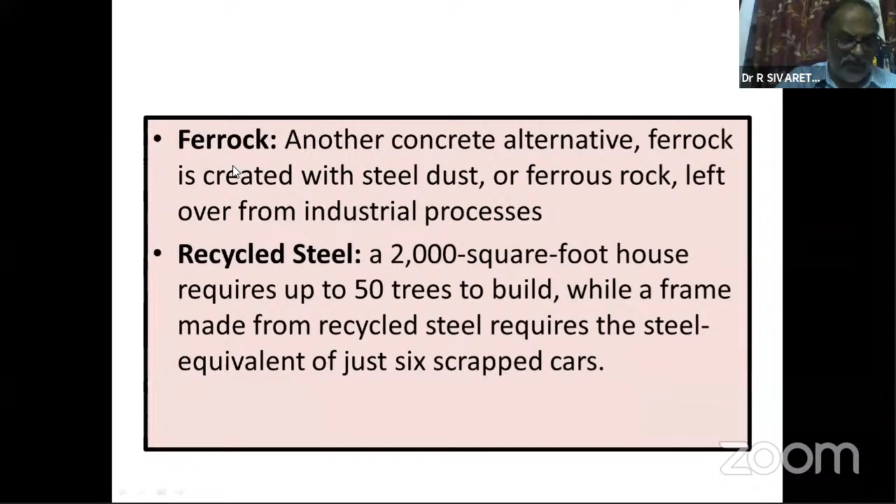Building materials are a major pollutant, but we must take effective steps to avoid pollutants by introducing green materials like ferrock and recycled steel. That is inevitable, and it is the need of the hour to introduce green materials, or otherwise we could leave nothing to the future generation.

So all the contractors and promoters must think of how to utilize green material for their construction and other perspectives relating to civil engineering work. That is a better way of providing a better life for the future generation.